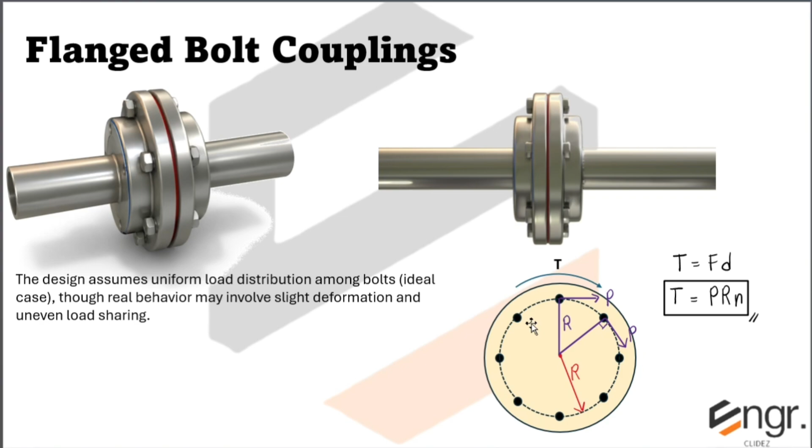The resisting torque is equal to the force in each bolt multiplied by the bolt radius multiplied by the number of bolts. Now in some cases, we would have 2 bolt circles, so dalawang layers ng bolts. So ito yung first formula natin. Now for the general relationship for concentric bolt circles with varying materials, this first figure is isang layer lang, assuming same material. But this one, we have 2 bolt radii. First is this one, from the center going to the outer circle, and another one from the center going to this inner circle. So, concentric bolt circles, and let's say varying materials. Sabihin natin, this is steel, and ito naman aluminum.

Yung general relationship natin for rigid flanges is that the shear deformations in the bolts are proportional to the radial distances from the shaft axis. Now, by Hooke's law, alam natin na shear stress is equal to the shear strain, gamma, multiplied by the shear modulus of elasticity, which is the same as modulus of rigidity. Yung label natin dyan is G.

So, simplifying, the strain is equal to tau divided by G. And again, the shear deformations in the bolts are proportional to the radial distances from the shaft axis. So, we define the shear deformation in terms of the strain. So, we have strain 1 corresponding to, let's say, the inner layer is equal to strain 2 corresponding to the outer layer. Proportional daw sila sa radial distance.

So, yung radial distance for the outer layer, let's say this is R2, and the radial distance for the inner layer is equal to R1. So, gamma 1 is to R1 equals gamma 2 is to R2. But we know that strain is equal to tau divided by G. So, we have here tau over G. Yung G, ilalagay ko na lang beside R1. So, for the first material, we have tau 1 over G1 R1 is equal to tau 2 over G2 multiplied by R2. So, this is the general relationship.

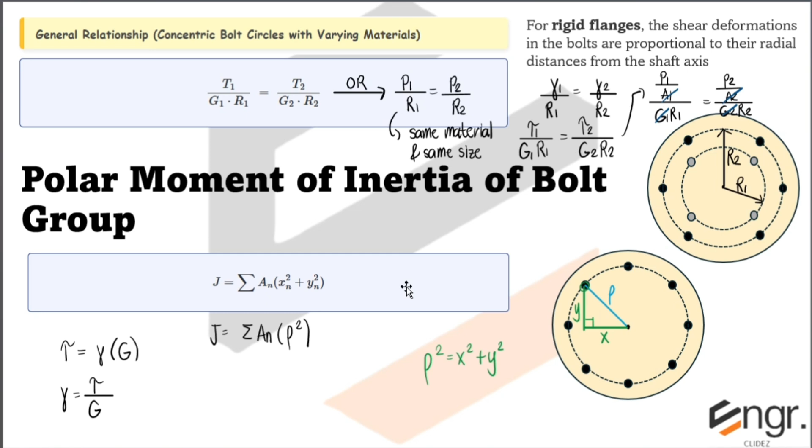Now, by Pythagorean theorem, we can form a triangle kasi this is a right triangle. Diba, by Pythagorean theorem, hypotenuse squared is equal to x squared plus y squared. So, you may also change this one. Magiging J is equal to the summation of A sub n, where A sub n is the area of each bolt, multiplied by rho squared. So, ito yung polar moment of inertia of a bolt group. Now, this is helpful since alam natin na yung rho is the radial distance lang, so that would also be equal to the bolt radius.

Now, we will try to solve problems later using this general relationship and also using the polar moment of inertia of a bolt group. So, let's first solve problem 1. A flanged bolt coupling consists of 8 10 mm diameter steel bolts on a bolt circle 400 mm in diameter and 6 10 mm diameter steel bolts on a concentric bolt circle 300 mm in diameter. So we actually have two layers. For the outer circle, the bolt circle is 400 mm in diameter. So we have this one right here, the outer one. And for the inner one, the bolt circle is 300 mm in diameter, consisting of 6 10 mm diameter steel bolts.

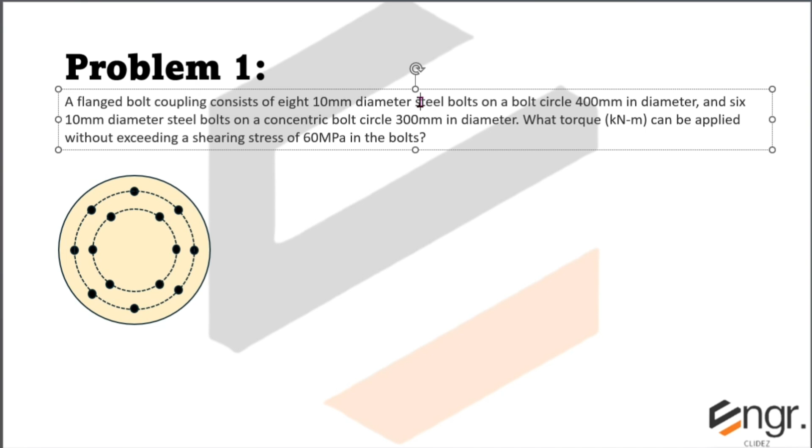So steel yung first layer, steel din yung second layer, made of the same material pala sila. And then yung diameter ng outer layer is 10 mm, sa inner 10 mm pa rin, so same material and same size. We can use this general relationship, P1 over R1 equals P2 over R2. Now, the question is, what torque can be applied without exceeding a shearing stress of 60 megapascal in the bolts? So, to solve this problem, since we have two layers, we first define our center. Draw tayo ng line dyan. Ito yung center. And we can define this as P2 for the outer layer. And for the inner layer naman, we have P1. So, meron tayong distance na R1 and R2.

Now, what is R2? R2 corresponds to the outer radius. Be careful lang since yung 400 mm dyan is the diameter. So, dividing that by 2, makukuha natin yung radius. R2 pala is equal to 200 mm. And R1 naman corresponds to the inner radius. 300 mm yung diameter ng inner circle. So, half of that is 150. So, R1 equals 150 mm.

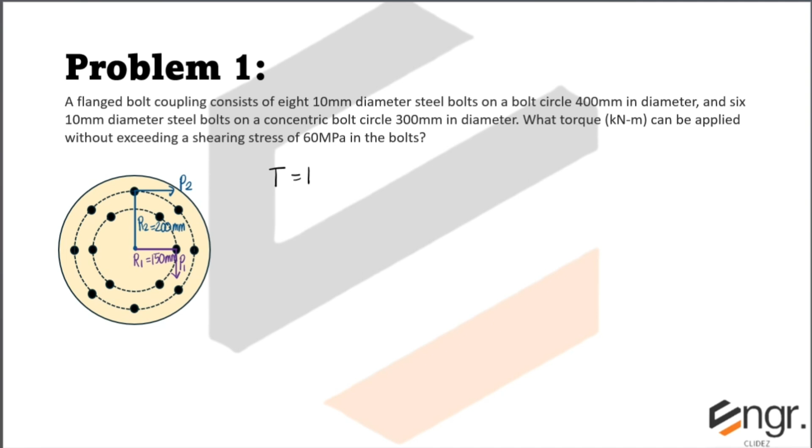Now, if we're gonna sum up the resisting torque, di ba alam natin na T is equal to P multiplied by the moment arm, R, multiplied by the number of bolts. Now, since we have two layers, we're gonna sum up P1 R1 multiplied by N sub 1 plus P2 R2 multiplied by N sub 2. So this will be our torque. Now, the problem is, hindi natin alam yung P1 saka P2. So, we have P1, R1 is equal to 150. This is in mm. And the number of bolts sa first layer is equal to 6.

So, multiplied by 6. Ayan. Then, plus P2 multiplied by R2. R2 naman is equal to 200. And N2 is equal to 8. We have 8 bolts sa outer layer. Again, this is still in mm. Then, multiplied by 8. Ayan.

Now, notice na we have two unknowns. But we can describe one in terms of the other. Alam kasi natin na if same size and same material, we have this relationship: P1 over R1 is equal to P2 over R2. Ayan. Now, R1 is equal to 150. So, P1 is to 150 equals P2 is to 200. We can multiply 150 sa kabilang side ng equation. So, P1 equals P2 multiplied by 150 over 200. And this would simplify into 3 over 4. So, P1 equals 3 over 4 of P2.

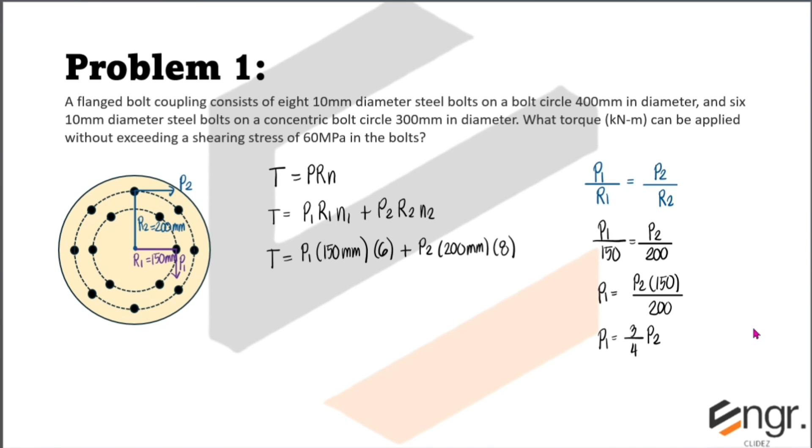So, yung next question is, what carries the larger load? Is it the outer layer or the inner layer? By inspection, the larger load is carried by the outer layer. Kasi nga, yung P1 is only 3/4 or 75% of P2. So, mas malaki yung P2. Therefore, yung shearing stress na 60 megapascal, we need to equate that sa outer layer since magagovern kasi yung mas malaking load na dinadala. So, P2 is larger than P1, P2 governs. So, if P2 governs, we apply this limit sa shearing stress in order to solve P2.

So, alam natin na tau is equal to force over area. The shear stress is 60 megapascal, equal to Newton per mm squared yan, yung megapascal. Then, yung P is actually P2 and our area is equal to 10 mm yung diameter, so pi over 4 multiplied by 10 mm squared. So, we can now solve P2. So, P2 pala is equal to 4712.38898. And this will be in newtons. Magka-cancel kasi yung mm squared.

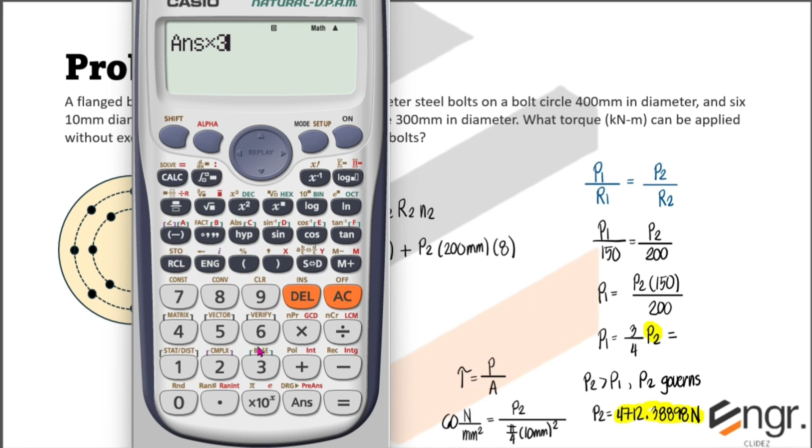So, if this is P2, we can also solve P1 na. We just substitute this value for P2. So, 3/4 of this value, P1 pala is equal to answer multiplied by 3 over 4. So, we have 3534.291735. And this will be in newtons. So, we substitute these values sa torque na expression natin. Shift store, lagay ko na lang yan sa B. And yung isa naman, 4712.38898, shift store, lagay ko sa A.

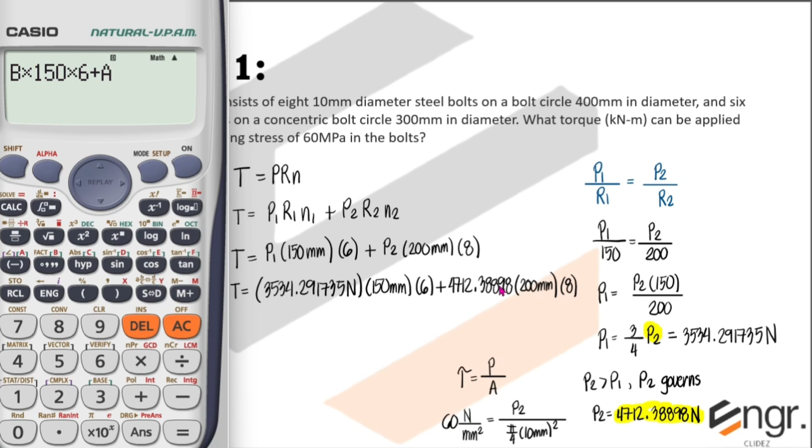So, B, yan yung 3534, times 150 multiplied by 6 plus A, this one, times 200 multiplied by 8. We have this value. Now, this unit is in Newton mm. You can convert this into kilonewton meter by dividing this by 1,000 squared. So, this is equal to 10.72 kilonewton meter. So, this would be our final answer.

Now, alternatively, we can use the formula tau is equal to TR over J. Diba ito yung formula natin sa maximum torsional shear stress for solid or hollow shafts. We can also apply this right here. But yung J na gagamitin natin would be the polar moment of inertia of the bolt group. So, recall na yung formula natin is summation of area multiplied by rho squared. Since same material lang yung inner layer and outer layer, we can factor out the area. And yung summation of rho squared will just be the number of bolts multiplied by the respective radial distances, quantity squared.

So, bali ito yung mangyayari. The shearing stress is limited to 60 megapascal, so 60 Newton per mm squared, equals TR over J. Yung T, torque yung hinahanap, in kilonewton meter. So, we have T multiplied by R. Ano yung R na gagamitin? Yung R is the largest radial distance which corresponds to the outer circle, with a radius of 200 mm. And yung J will be equal to the area of one bolt, factored out: pi over 4 multiplied by 10 mm squared.

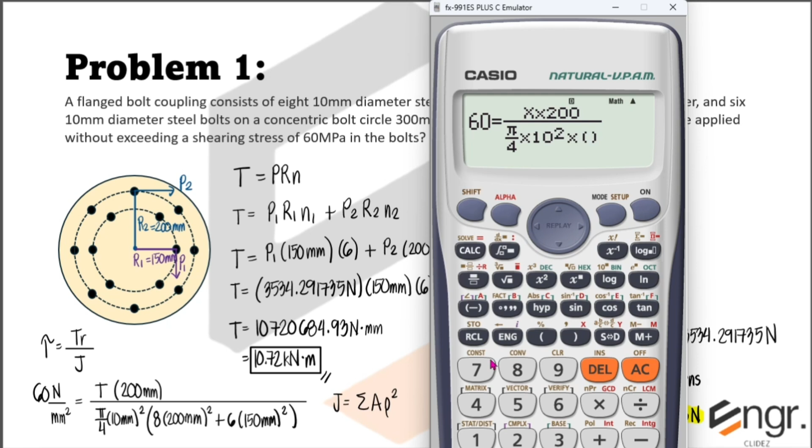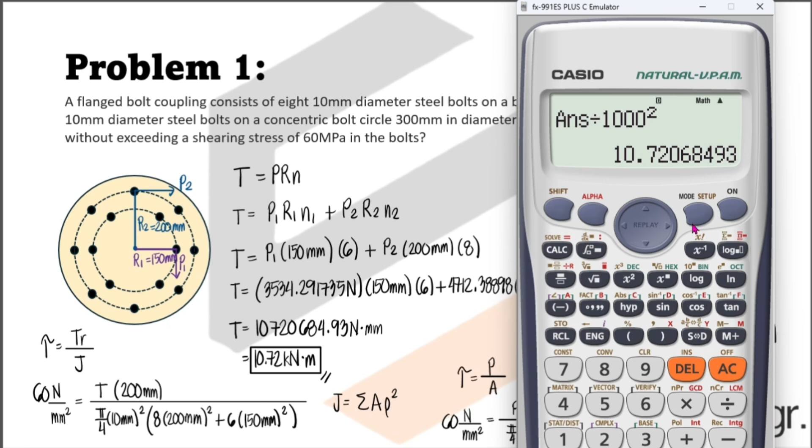So if we try it here, we have 60 is equal to T multiplied by 200, divided by pi over 4 times 10 squared times 8 times 200 squared plus 6 times 150 squared. Shift solve, kunin natin si T, we obtain this value. Same lang kanina, up to the last decimal place. Exact talaga. We divide this by 1,000 squared para maging kilonewton meter. We still arrive with the same answer, 10.72. So, solving T using this formula still yields the same value.

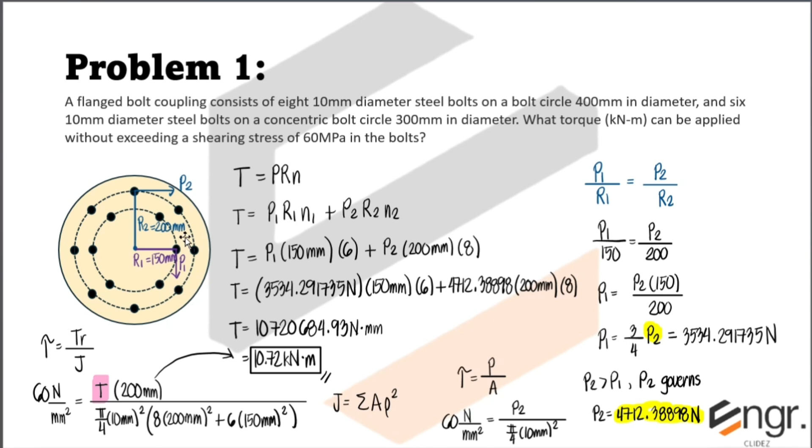But you can only apply this if same yung material. If hindi same yung material, mas maganda if yung solution is by the conventional method. We use tau1 over G1 R1 equals tau2 over G2 R2. Or simply, yung mnemonic dyan is tiger.